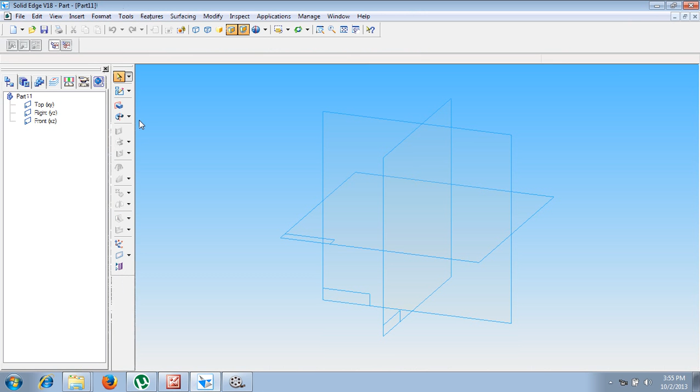Now this has to be done using a command called revolved protrusion. Let me show you how to do this component. Let me go for solid part, then revolved protrusion. Let us go for the front plane as the sketching plane. Now using circle by center point, draw two circles. One has a diameter of 40 mm, the other a diameter of 32 mm. Let me position it somewhere here. Now using the smart dimension option, lock the values as 40 and 32.

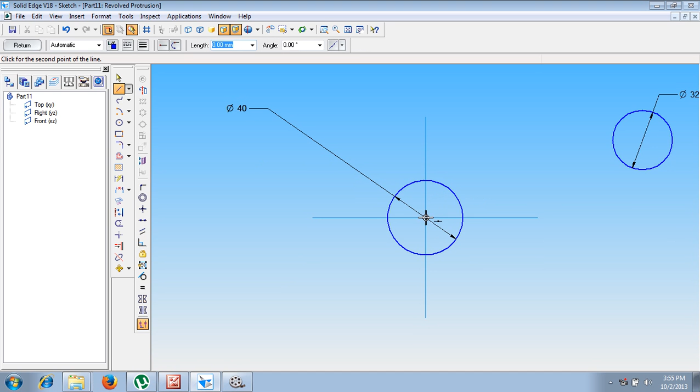Then make use of the line command. Starting from this midpoint, join to the center point over here. The angle is supposed to be given as 15 degrees over here. Now make use of the distance between command. If it is horizontal and vertical, change it to by 2 points. Then select this circle and select this circle. It is going to measure the center to center distance, which is given as 135 mm. Now let us say fit. Now we have constructed these things.

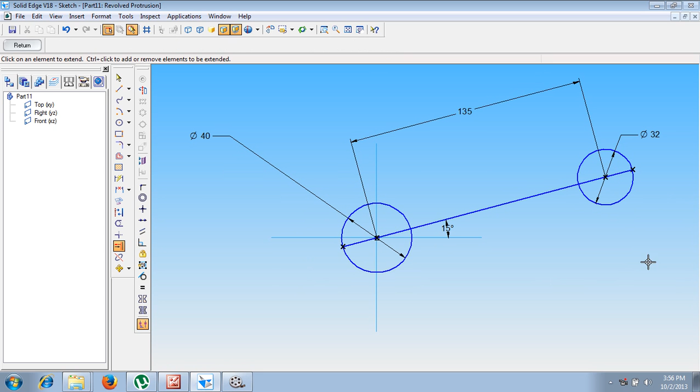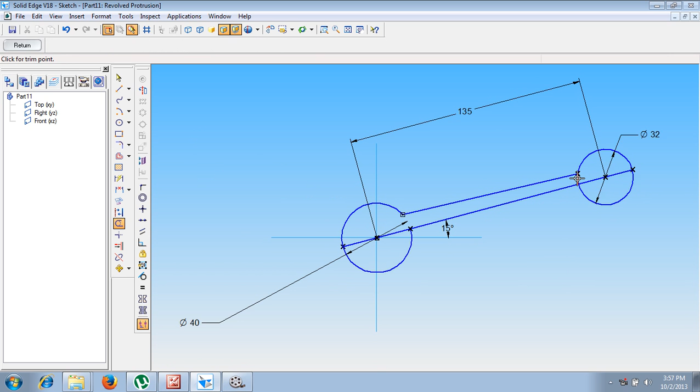Then make use of a command called extend to next. Extend this line to here, extend that line to there. Now make use of the line command. Starting from anywhere on this line, it should not be a tangential line, simply fixed there. Draw a line like this. Don't connect it to a key point, just connect to a point on element anywhere. After doing this, make use of a command called trim. Then trim this portion as well as this portion, the outer portions which are not required.

Now we know that the distance between this line and this line is 12.5 mm, because from this point to this point it is given as 25, so from here to here it becomes 12.5. In the same fashion, this point to this point is given as 12, so from here to here it becomes 6 mm. Let me show you how to create that. Using the distance between command, the distance between this end point and this line is 6 millimeters. So we have given all the necessary dimensions.

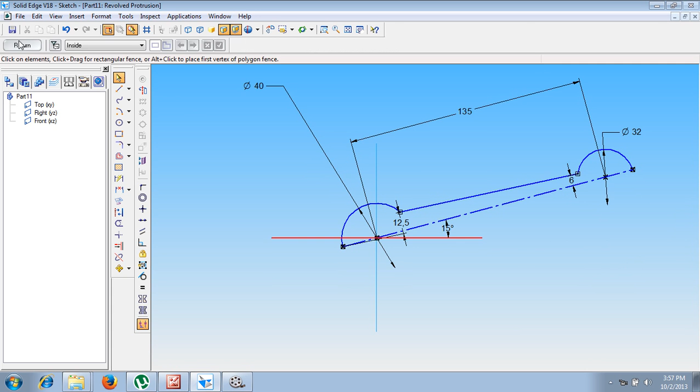Now make use of the axis of revolution command. Select this line as the axis of revolution, then say return. After that, revolve 360 degrees, and the base portion of the handle is completed. After that go for a command called cutout. Let us select the front plane as the sketching plane. Now draw two rectangles like this, one, and similarly one more.

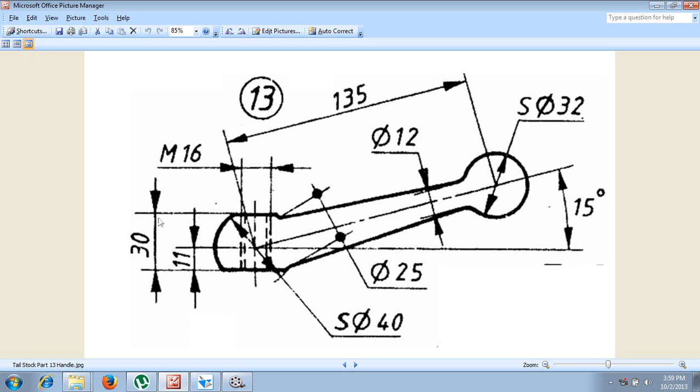We have to draw two rectangles like this, 1 and 2. The distance from here to here is given as 11 mm, and in the same fashion the distance between this edge and this edge is given as 30 mm. But if we draw it at 30 mm, we cannot create the M16, so let us use 28 mm instead of 30 mm, because it might be a printing mistake. For 30 mm we cannot create the M16 hole at this surface, so let us consider this 30 as 28 mm. Now let me give 28 mm.

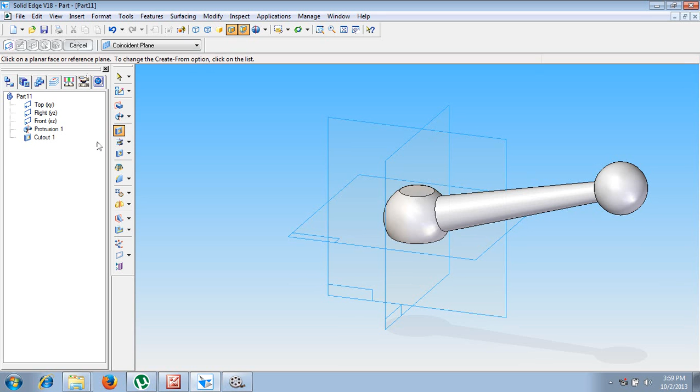Now you can see it is coming slightly below. Let me say return. Let me go for through next, and let me go to this center so that the cutout happens in both directions. Then let me say finish. Now we have a command called hole. Select the top portion. Now go for hole options. Select the diameter of 16 mm threaded hole.

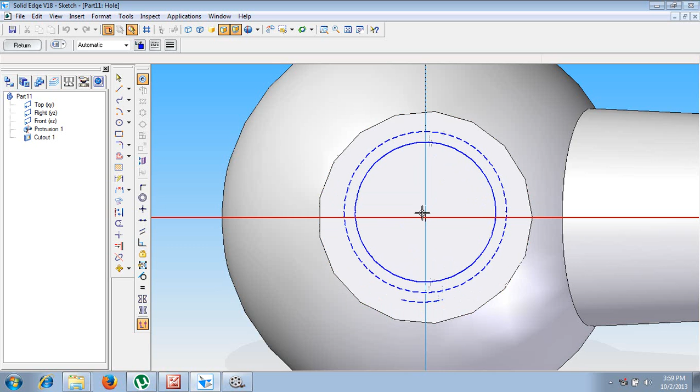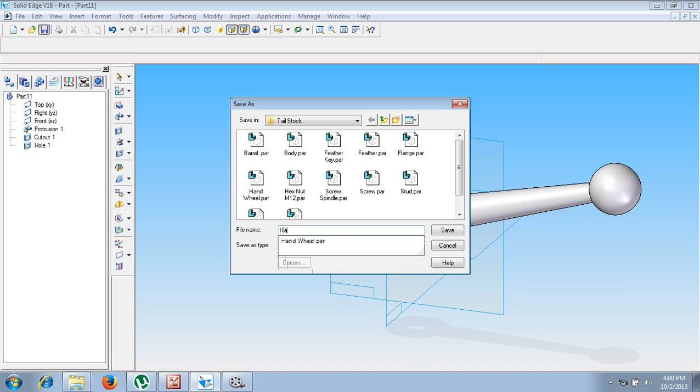16 mm threaded hole. I want it threaded throughout the hole with the M16 standard. Then let me say finish. Then let me position the circle properly at its center. Then let me say return, give the direction of cutout, and say finish. Now using the save command, go to summary. In the summary, go for title and make it handle. Now save this file as handle. So this completes the 13th part of the tailstock, called the handle.